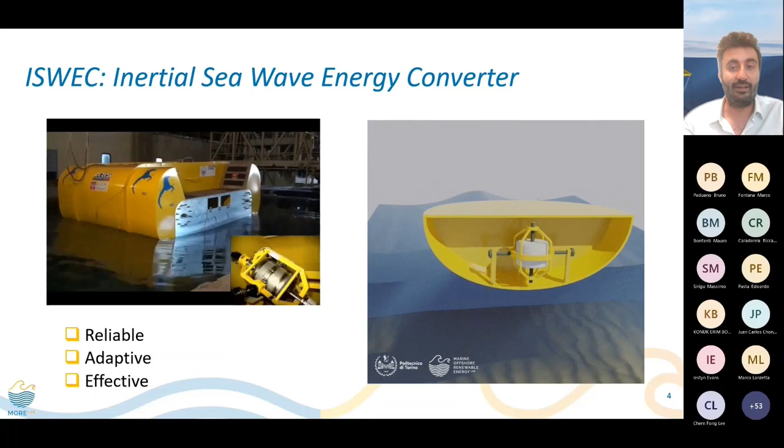So here you can see our timeline, apart from modeling, also for the experimental tests. You can see the evolution on the hull, maybe it's the easier to see. Then there was evolution on modeling and control. The first tests actually were carried out at the curved wave tank in Edinburgh. And then we moved on, improving modeling, control, all the activities.

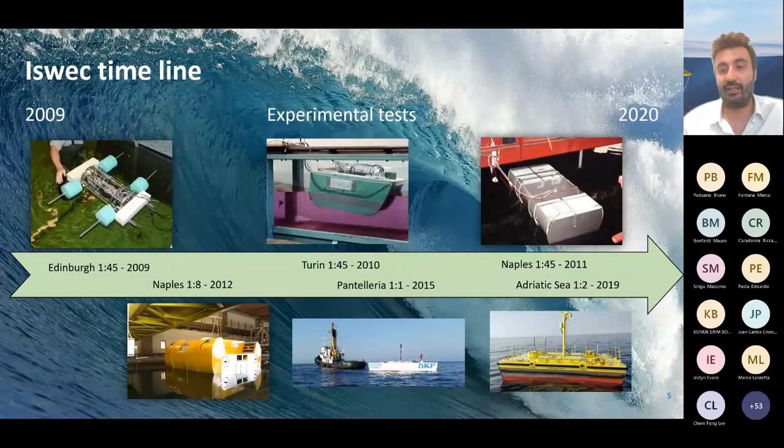And basically after 6 years of activity, in 2012 we did the average scale 1 to 8 test in the bigger wave tank of Naples, and in 2015 we put the first device in the sea. Since 2015 to nowadays, the ISWEC technology is under attention for Eni, that is the Italian oil and gas company, and this is our history.

So I will close the wave history with this picture of the ISWEC. After 10 years of development, the group was able to pass from the idea to the full-scale machine put in Pantelleria. Pantelleria is an island in Italy, and it has a very good potential for both wave and wind. Wind is a good potential because it's more than 40% capacity factor. Wave is good in the scenario of the Mediterranean Sea; it is one of the most energetic sites.

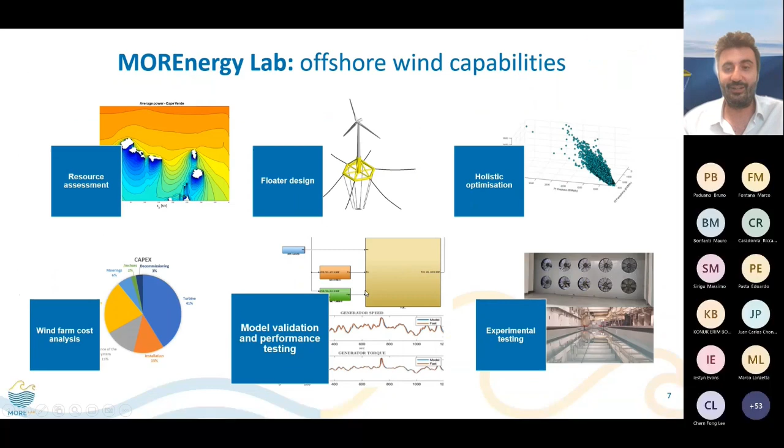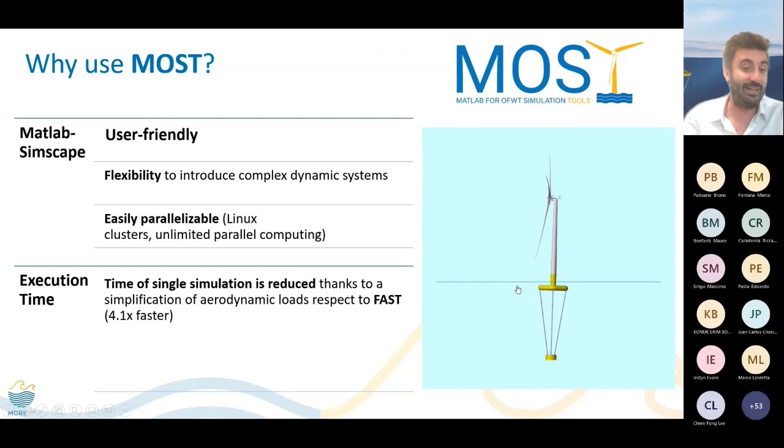So going a bit back on the competencies, everything from resource assessment, modeling, design, cost analysis, validation, is something we like a lot to do, and it's our normal operation together with experimental testing. So let's move a bit on the MOST side. I will not give any spoiler on this. Why use MOST, probably my colleagues will explain it later. Just a small anticipation: very user-friendly, flexible, parallelization, and good execution time.

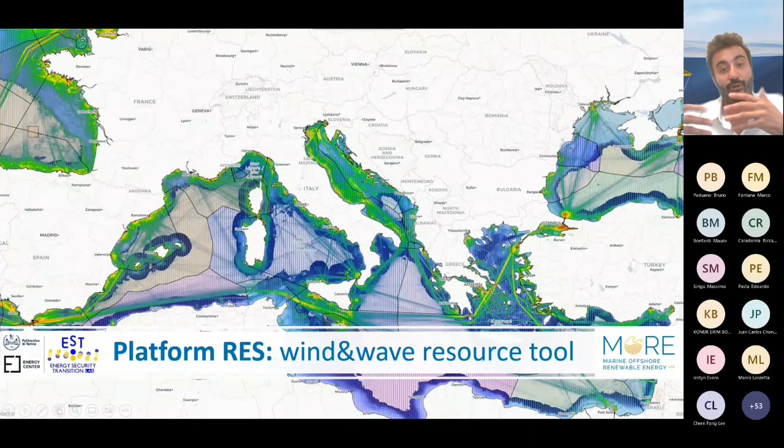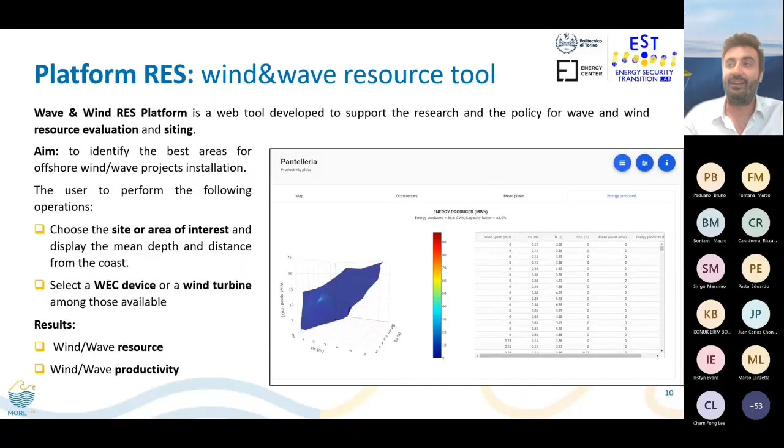And apart from MOST, what we do also, we try to make up the RES platform, Renewable Energy Sources Platform. It's a platform that uses public databases crossed together to analyze the potential from both wave and wind power in a certain marine area. So it's a platform we are building. Here you can see just some screenshots. And if you need any information, just write to us, and we will be very happy to give any information.

Closing on experimental tests. Here you can see on the bottom left picture our first, I can say, full-scale machine, even if it's not full-scale, because it's only a 3 kilowatt wind turbine, representative of a 5 megawatt put into the sea. This one was only put onto a lake, because the lake has a very good and predictable thermal wind, very small waves, and that is something we did in 2008 with this project, with a particular turbine that was also produced here in Italy with a particular construction technique. It was a spar buoy put into the lake.

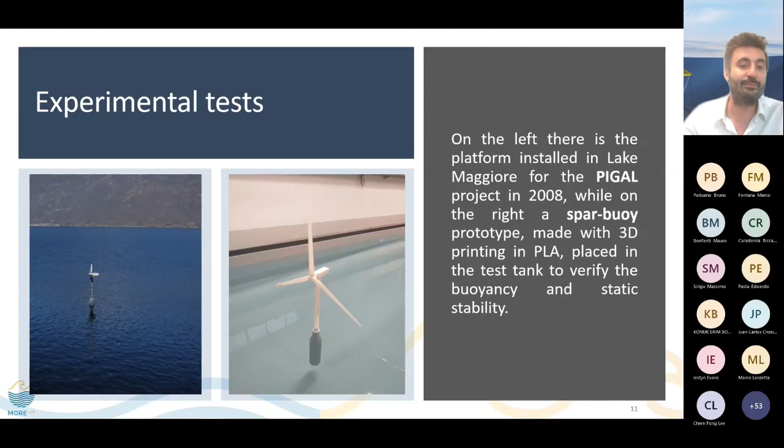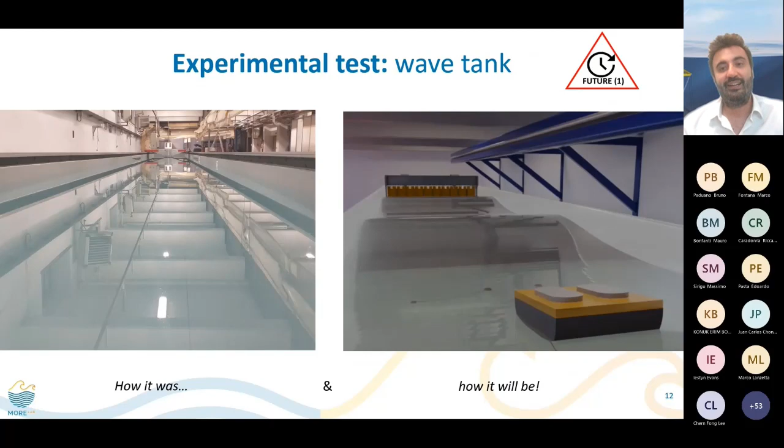We don't have a wave tank. Actually, we roam around Italy and especially Europe, also the USA, to do our experiments. We have only a static tank that you can see on the left, but in a couple of years, let's say 3 years, we will have our internal wave tank, also with the offshore wind capabilities.

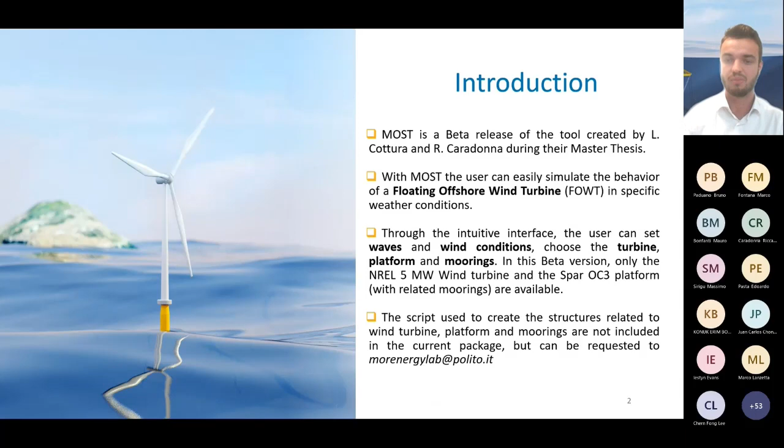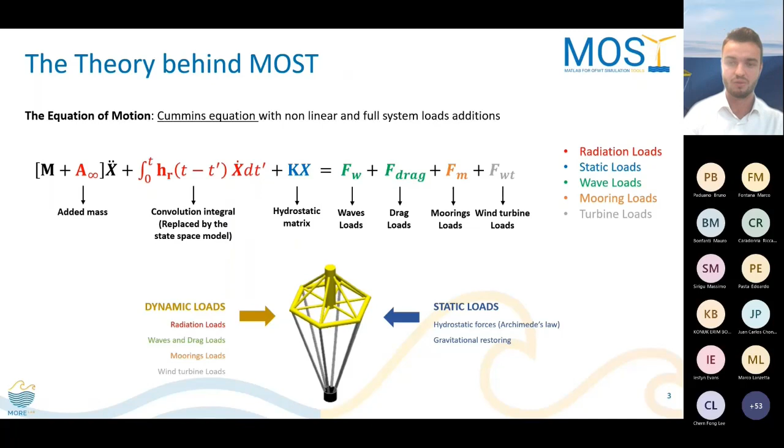The theory behind MOST is the Cummins equation, that is the second dynamic law with the addition of the added mass, the convolution integral that in this case is replaced by a state space model, the hydrostatic matrix, and then the loads relative to waves, drag, mooring, and wind turbine. So we have an overall of static and dynamic forces and moments, so we can call them loads.

The other important theory behind MOST is the one for the wind turbine, that is the blade element momentum theory with the corrections of Prandtl tip loss, Glauert, and skew wake. This theory works starting from the mean wind at the hub coordinate. We detect the position of each node of each blade, and then with TurbSim we find the wind in those positions.

Then with the BEM theory, we find the axial and tangential induction factors, from which we finally find the loads relative to the rotor. Then we apply a control logic on torque and on the blade pitch to obtain finally the wind turbine power and the reaction loads at the base of the wind turbine tower.

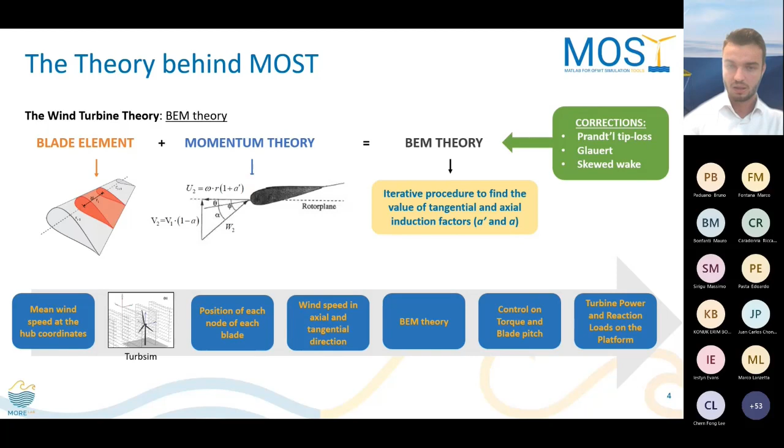Why did we create MOST? MOST was born from our need to evaluate different kinds of platform and wind turbine concepts, different from the standard one. We started with FAST, which is the reference simulation software for offshore floating wind turbines. But it was tricky for us to set different kinds of platform with different characteristics. So we tried to reproduce the results obtained with FAST, but with a software more familiar to us. So we tried to use Matlab-Simulink.

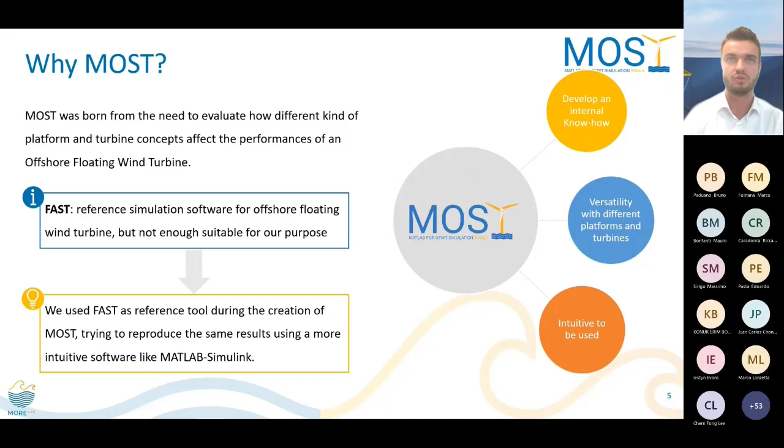Doing that, we created MOST, and we developed our internal know-how that is common in the entire MOREnergy Lab. We tried to find versatility for different kinds of platform and turbine. That is the reason why we created MOST. And then we also created a model that is intuitive to use, also for the first-time user. This intuitiveness can be seen also from the Simulink block diagram.

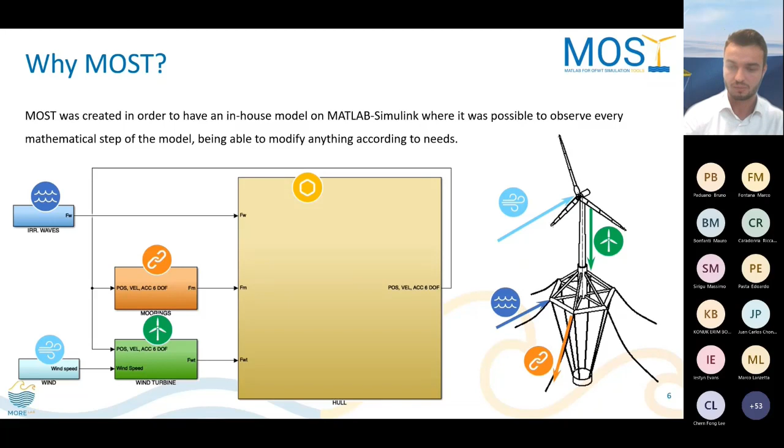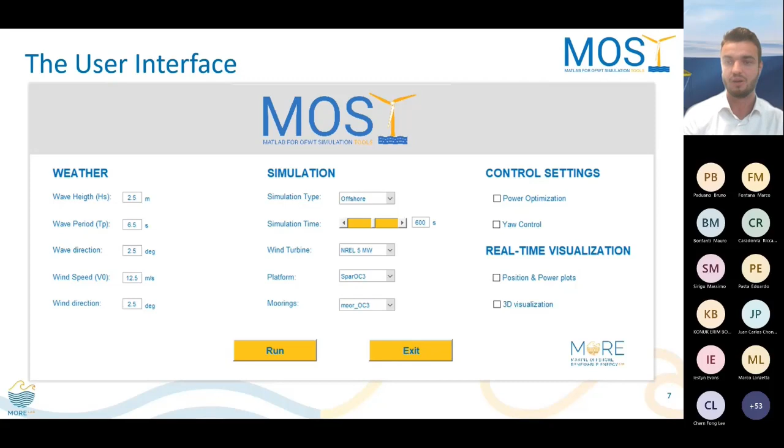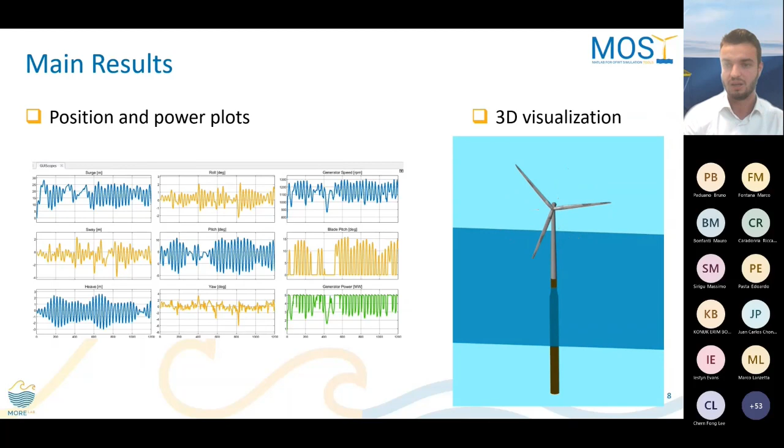As said before, we can obtain the position and power as an output of MOST, but also a 3D visualization in real time of the motion of the wind turbine, as you can see in this brief video. Finally, we made a comparison between MOST and FAST to test our results. We aimed to achieve a root mean square error on position and output power lower than 2%.

MOST is flexible and user-friendly. We managed to reach a very short simulation time. We managed to run 20 minutes of simulation time in less than 1 minute. Our principal defect, the principal con of MOST, is the absence at the moment of the aeroelastic theory.

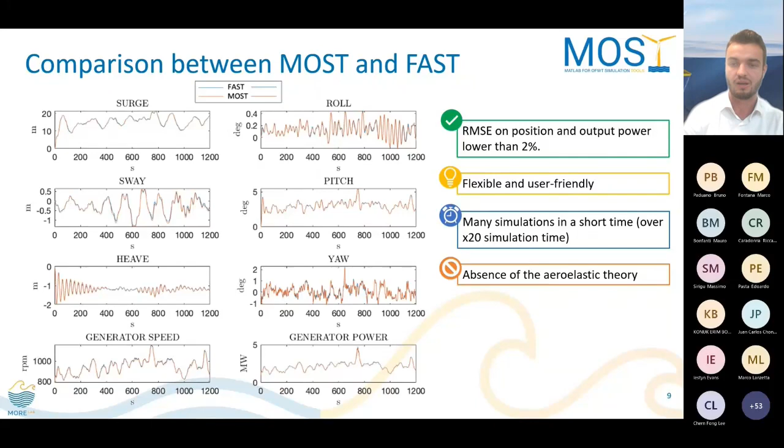So now I give the floor to Riccardo, who will show us a simulation using MOST.

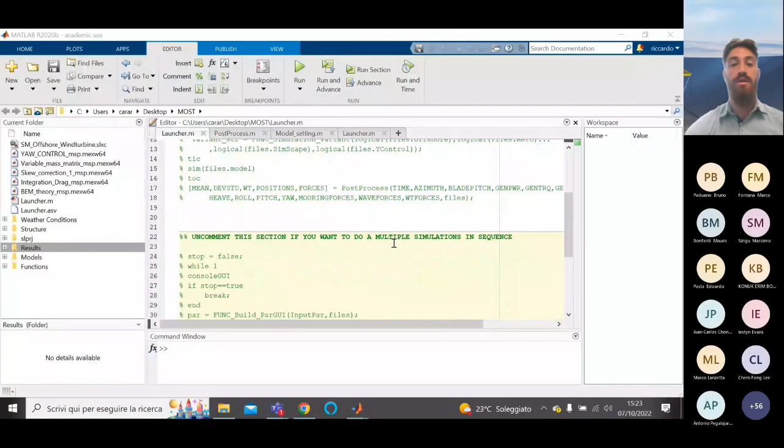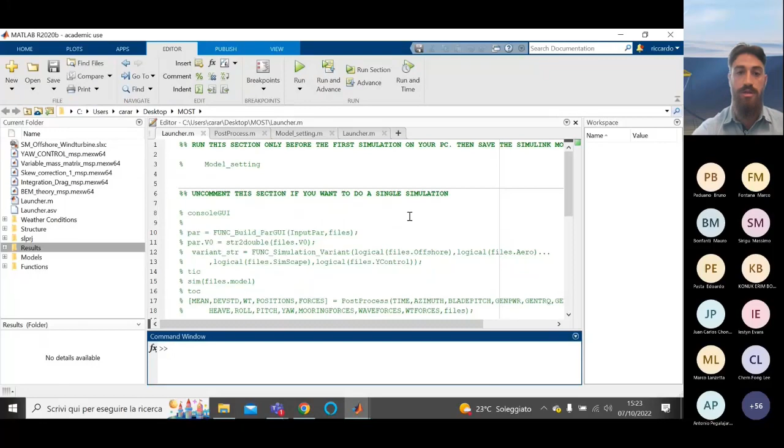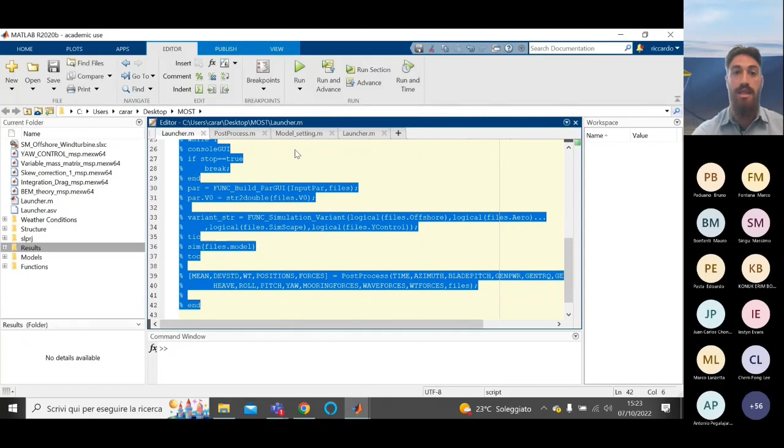Now I'm going to do a simulation to show how MOST works. MOST was created to allow the user to interface with only one script, called launcher, located in the MOST folder. This script is divided into 3 main sections: the first is used only after the initial installation since it reallocates the directory, and the other 2 are simulation sections—one for a single simulation and one for multiple simulations in sequence. Now I'll uncomment this last section and click the Run MATLAB button.

After clicking, a user interface appears, divided into 3 main sections. On the left, we have the weather conditions, both direction and intensity of wave and wind. In the center, we have the simulation parameters, like the location of the wind turbine, offshore or onshore. We can set the simulation time using the slider bar or by directly inserting the time in seconds in the box, and then choose the structure of the wind turbine.

In this beta release, we have only the NREL 5 megawatt wind turbine, Spar OC3, and Moor OC3. On the right, we have the control of the wind turbine and real-time visualization. We have 2 options: plots of position and power, and a 3D visualization of the displacement of the wind turbine.

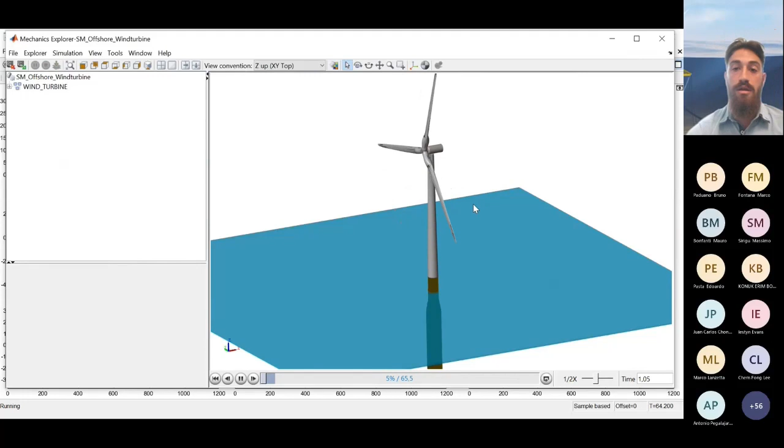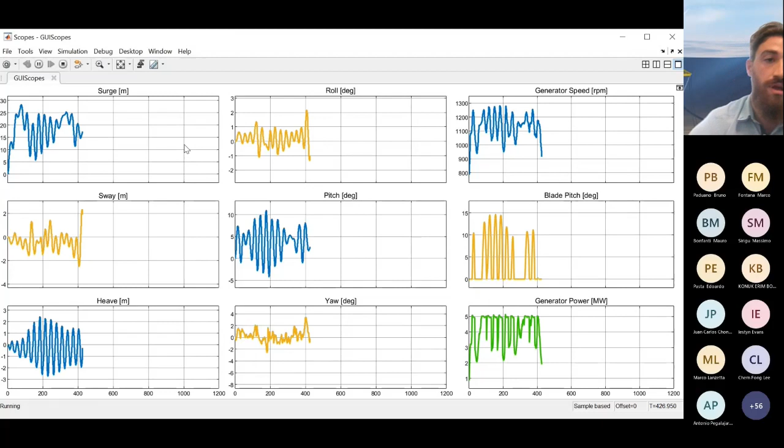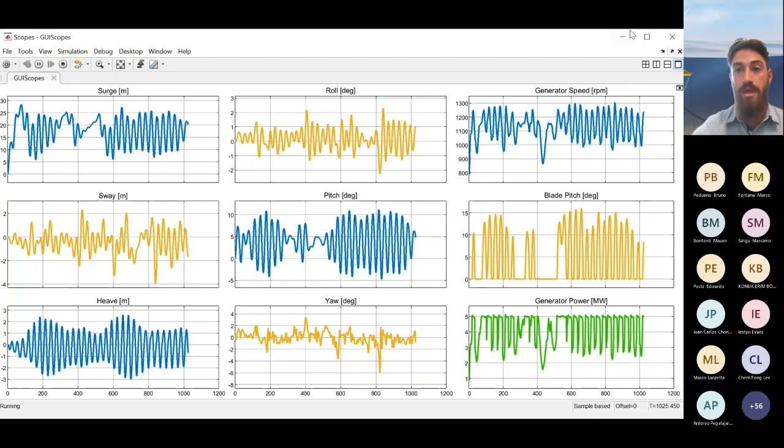Then I click the Run button of the user interface, and after the Simulink model compiles, the 3D visualization appears to show the movement of the wind turbine, along with real-time plots showing the main displacements—surge, rigid displacement, and rotation displacement—and the main generator characteristics like generator speed, generator power, and blade pitch control. The 3D visualization can be managed in terms of reproduction speed or viewer angle.

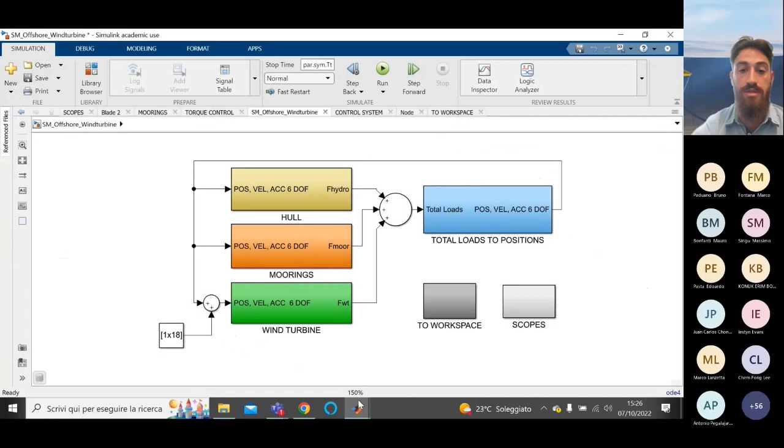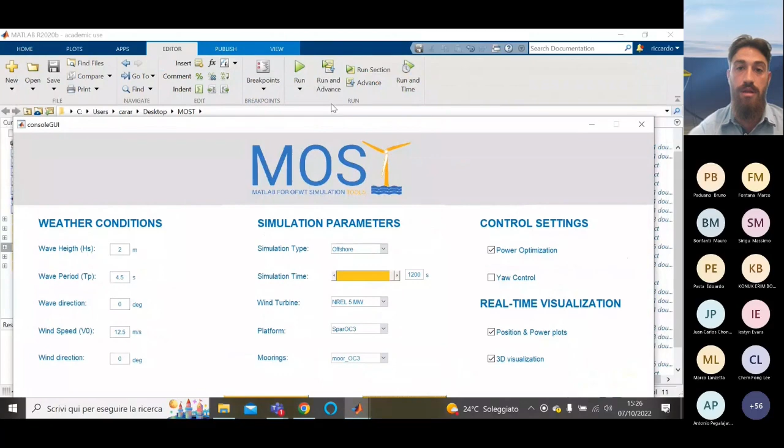After the simulation runs out, the control user interface appears again so you can set up a new simulation. If you want to exit the multiple simulation, you can just click the exit button, and as you can see, the MATLAB launcher exits as well.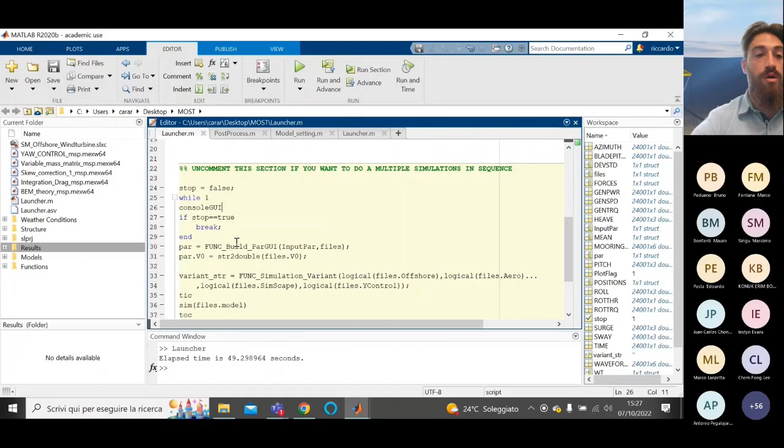During multiple simulations, only the last output is stored in the workspace, but all simulation outputs are stored in the results folder. As you can see, the time required to do a 20-minute simulation is only 49 seconds.

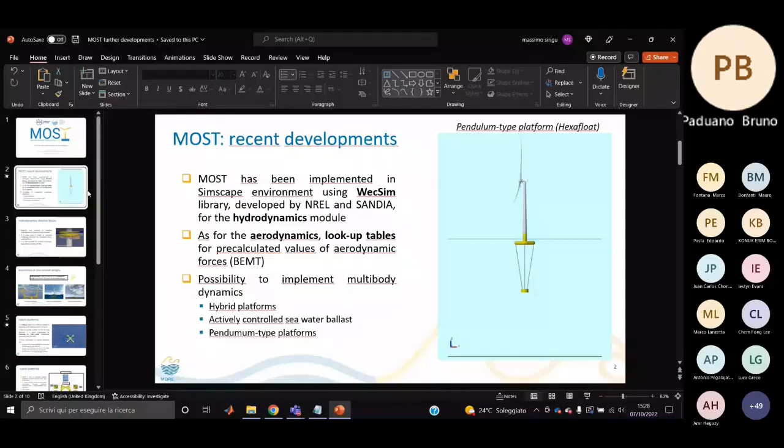New developments of MOST include its implementation in the Simscape environment, so we can use WEC-Sim for the hydrodynamics—a library developed by NREL and Sandia. The aerodynamics is implemented with lookup tables in which we use pre-calculated force values from BEM theory.

With Simscape, we can implement multi-body dynamics, allowing us to model a pendulum-type platform, as shown in the video on the right. We can introduce wave and wind platforms, and also ballast, where you can control the level of seawater in the ballast.

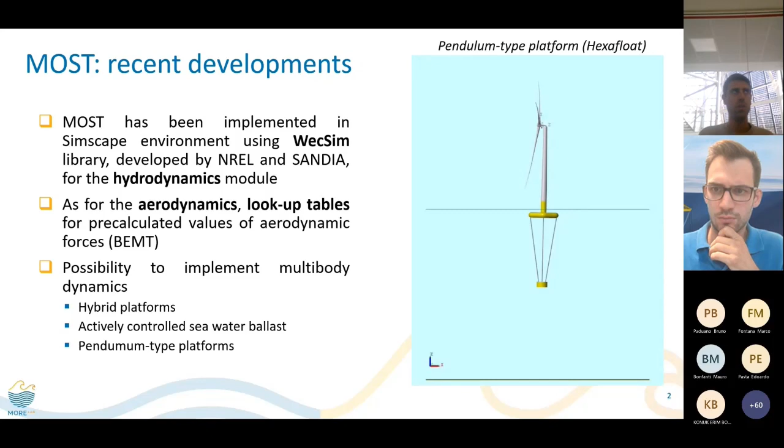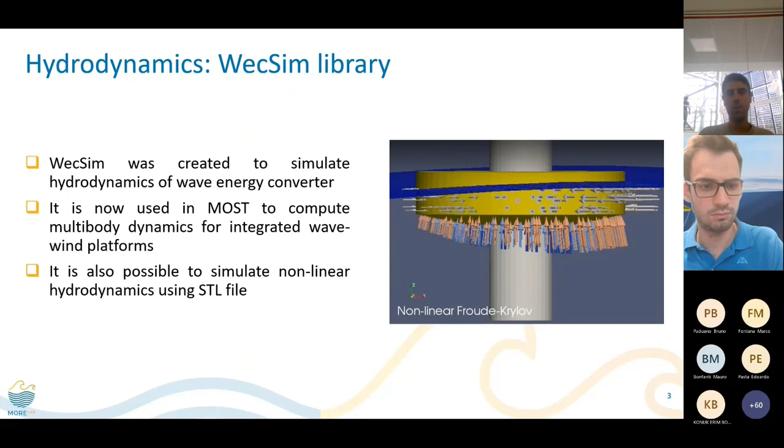WEC-Sim is a library developed by NREL, originally used for wave energy converters, but in our case we use it for evaluating the hydrodynamics of the platform. In WEC-Sim, the user can also use nonlinear hydrodynamics starting from an STL file.

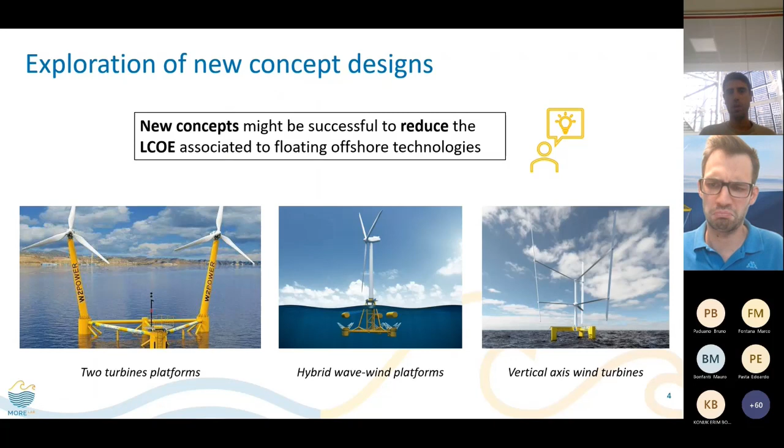With MOST, we can explore new concepts such as two-turbine platforms, wave and wind platforms, and vertical axis wind platforms. These technologies can help reduce the LCOE associated with floating offshore technologies.

With regard to the wave and wind platforms, we have introduced the WEC on the platform, as you can see in the video—this is an artistic representation of the platform.

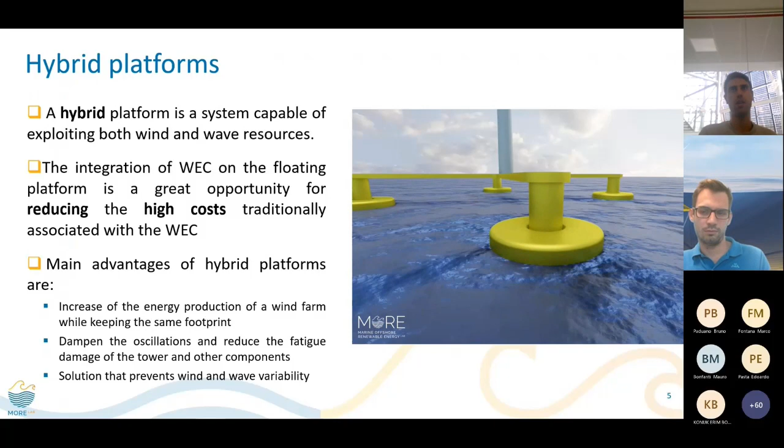The advantages of these platforms are increased energy production with the same farm footprint. You can dampen the oscillation of the tower, reducing tower damage, and you can also reduce the variability of wave and wind, resulting in a more stable power output.

In this example, in this paper, we developed a Nautilus 10 megawatt platform with a 10% reduction in LCOE, and we improved the stability of the platform with regard to pitch motion and nacelle acceleration.

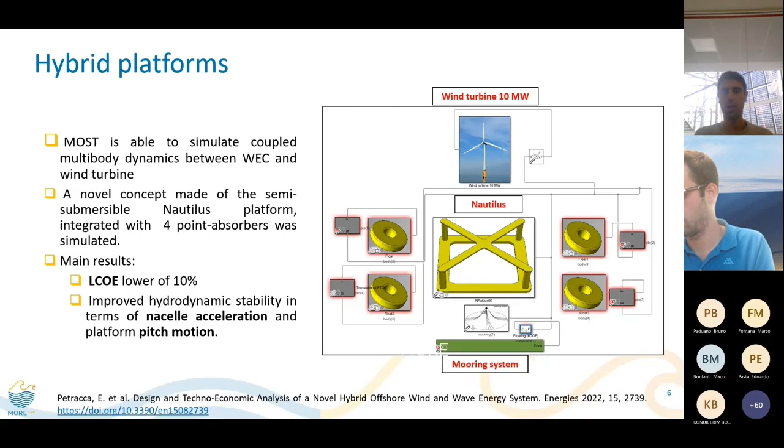MOST is also used with optimization for the platform. We have published 2 papers about the Sparbuoy and the Hexafloat. MOST in this case is integrated with 3D CAD software, Salome, which we used for creating the 3D CAD model that is then implemented in Nemoh for the evaluation of hydrodynamic properties.

In this case, for the Hexafloat, the results of the optimization concern the cost of the platform with regard to raw materials—the concrete and steel of the platform.

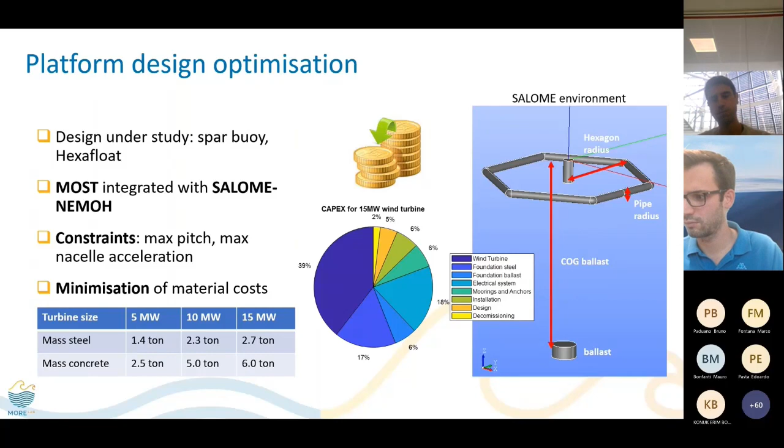In the future, the plan is to implement the flexibility of the blades and introduce fatigue analysis—stress analysis of the blade with Sonata, an NREL open source software—and the implementation of OWC, a wave energy converter that can be implemented on the substructure. Finally, we aim to implement mean drift and second order waves in the hydrodynamics.